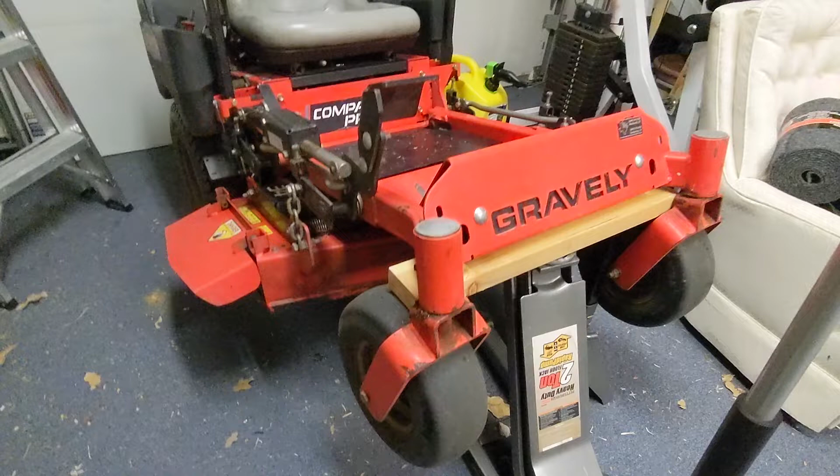Today we're going to be installing the Gravely Ariens OEM Mulch Kit on this Gravely Compact Pro 34.

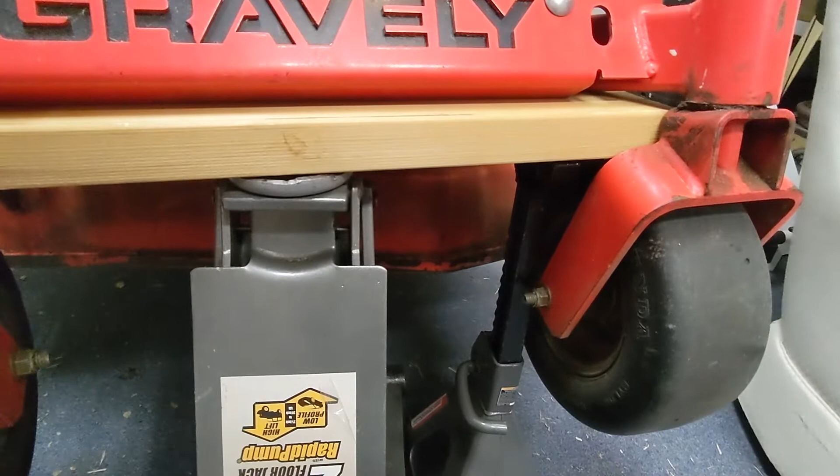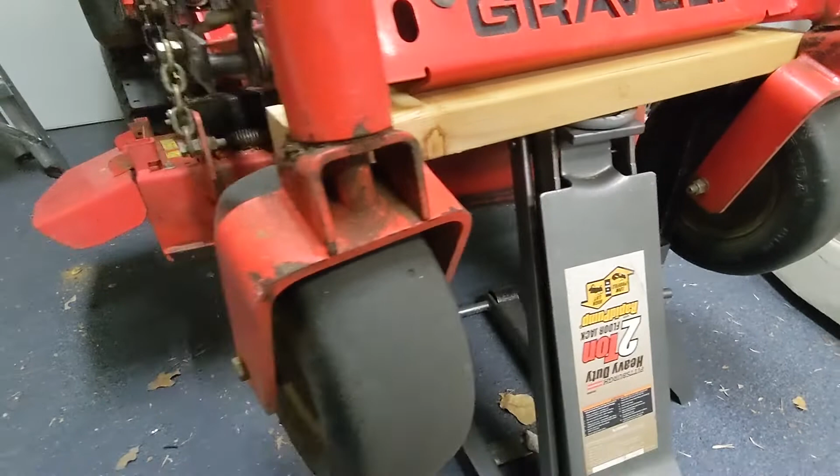As you can see, I've already got it up on a jack. Use a 2x4 across the front end and a regular 2-ton floor jack, and also make sure to use a jack stand. Lower the lawnmower onto the jack stand and then pump it up 1 or 2 more times so you've got support from both the jack and the jack stand, that way it doesn't fall on you when you're working on it. Add 1 more jack stand on this side. Now we've got plenty of access underneath to get to the deck, so that we can install our mulch kit.

Let's go see what's included in the mulch kit.

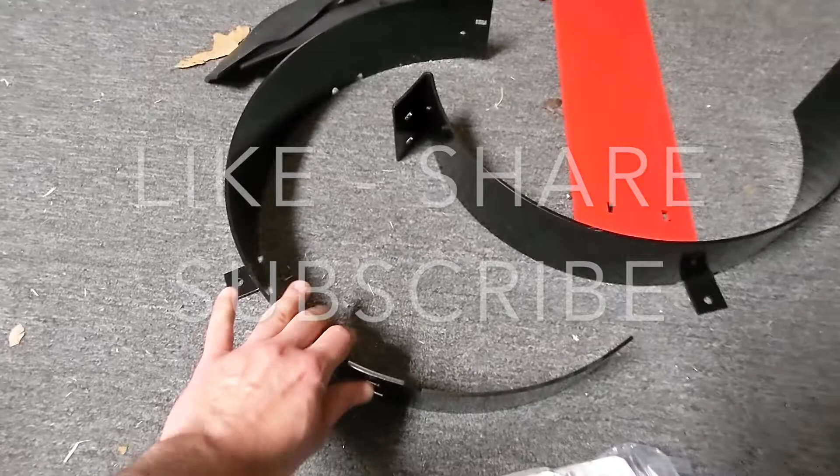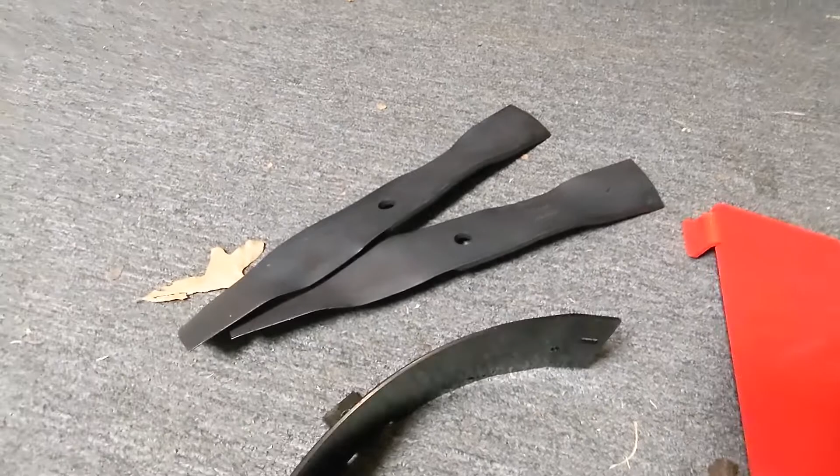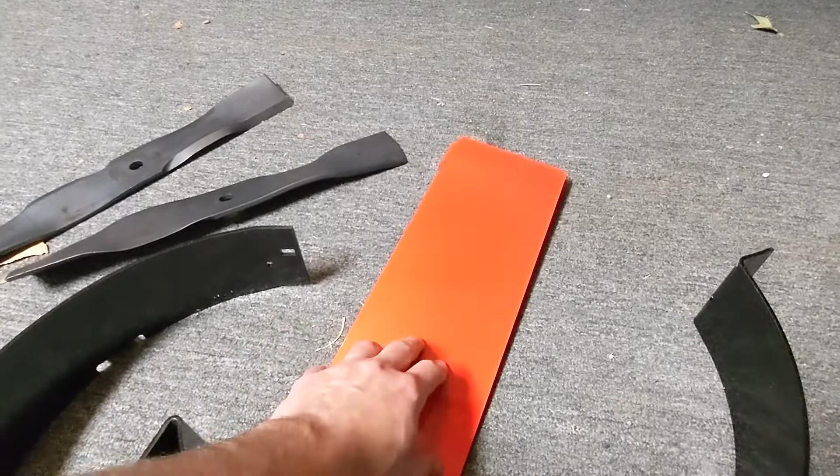In our mulch kit that just came in yesterday, we've got the 2 guards here that help isolate the blades in each of their chambers on the deck. We've got the 2 OEM mulching blades. You can tell because they have the standard lift edge that you normally would, but they also have another raised edge here, creating that turbulent motion under the deck that allows it to mulch really well. We've got the guard that goes on the outlet where the discharge would normally be for the grass clippings. We've got the hardware, which is nice that it came with, and then the instructions to get it put on.

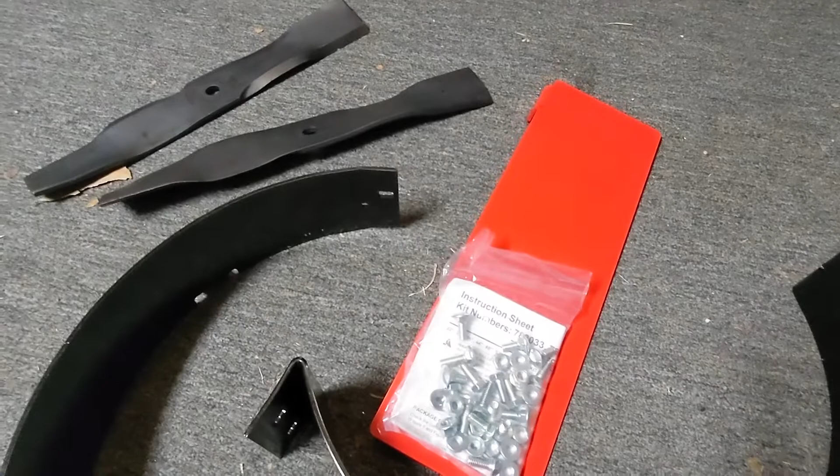So let's go see how all this comes together. The instructions are pretty universal for their different size decks, from the 44, 48, and 52 inch decks to the compact decks, the 32, 34, and 36.

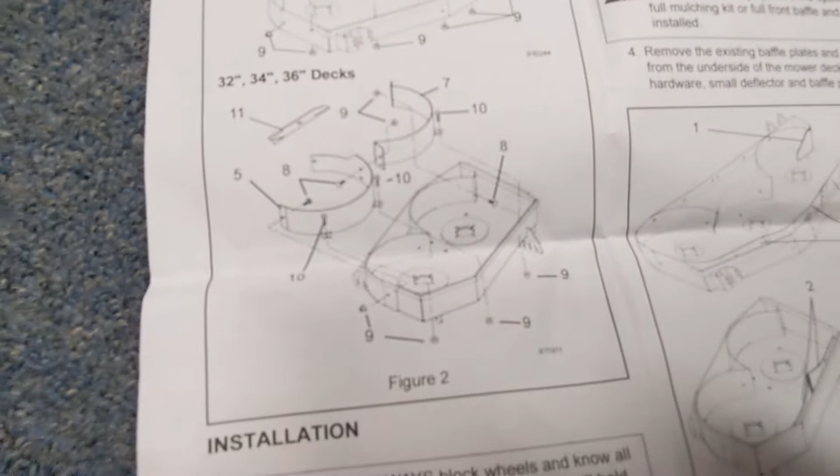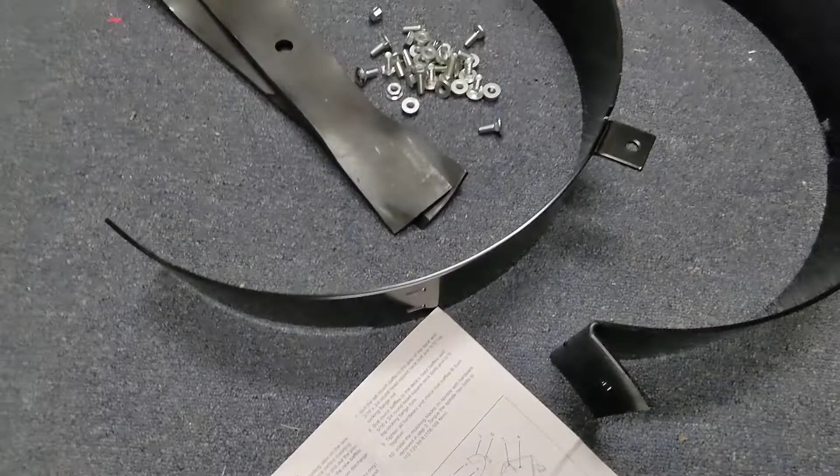We're going to take a look at this diagram, and you can tell the 2 isolator guards—there's one that's smooth, and then there's one that has the tabs on either end. If we compare that to what we've got here in the kit, you can see the same thing. We've got the one that's smooth and doesn't have any tabs on the ends, and then we've got the one that has the angled tabs on the 2 ends where it mounts, and then also they've got tabs where they mount to the top portion of the deck.

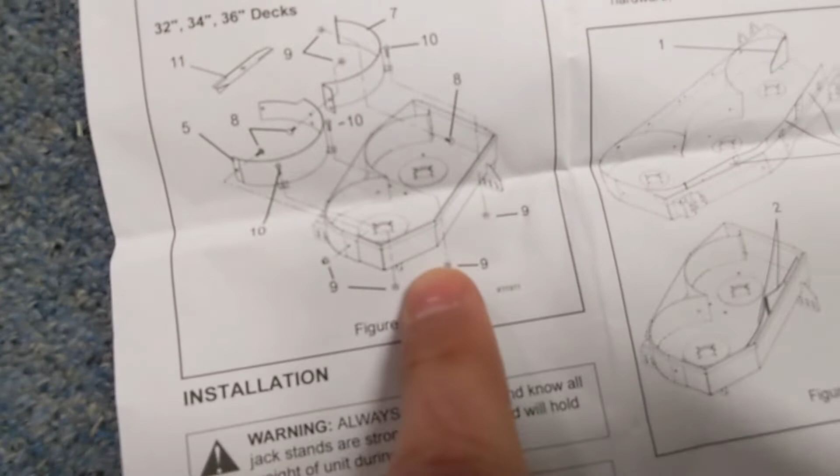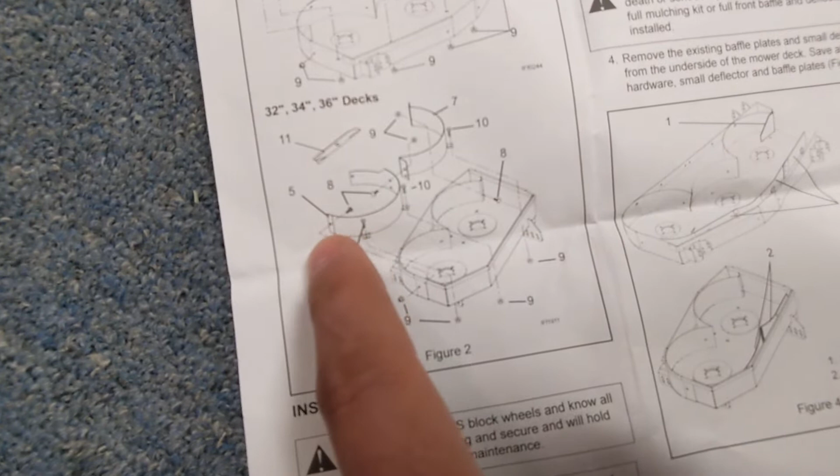If we look at the instructions, you can tell here on the deck, you've got the outlet of the deck on this side, and the isolator guard that has the 2 tabs on it goes towards the discharge port, and the one that has ends without tabs goes on the portion of the deck that is furthest away from the discharge.

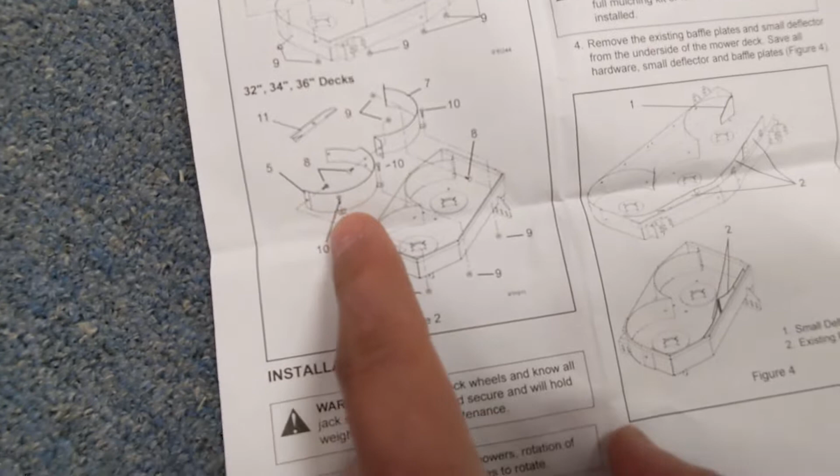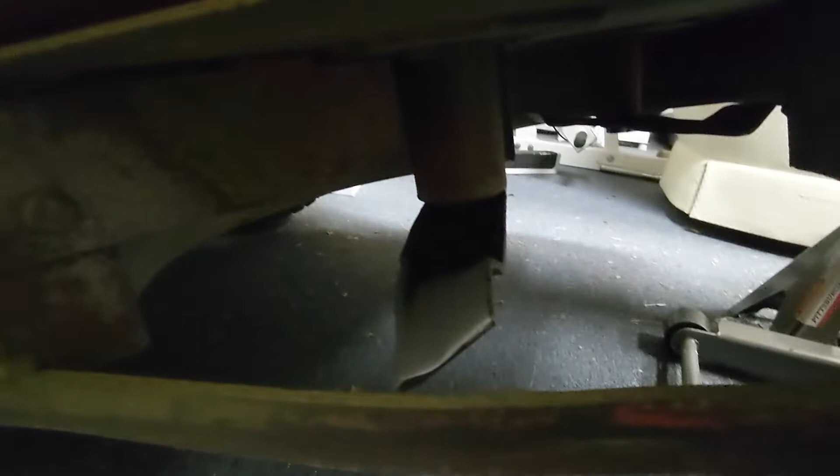So I'm going to go ahead and start on this one that's furthest away, and then we'll go step by step there. I'm going to lift this guy up, get it out of the way, give us some more clearance to look at everything. First thing we need to do is remove the existing blades.

You can tell these are high lift blades that are on here based on the extreme angle of the lifting edge. That's to get you to be able to discharge pretty efficiently, shoots the grass pretty far out. We don't need those on our particular lot where our house is—we're only on a half acre. Main reason for the zero-turn mower is because we have a lot of trees, and it makes it a lot easier to mow, being able to get around the trees a lot more simply.

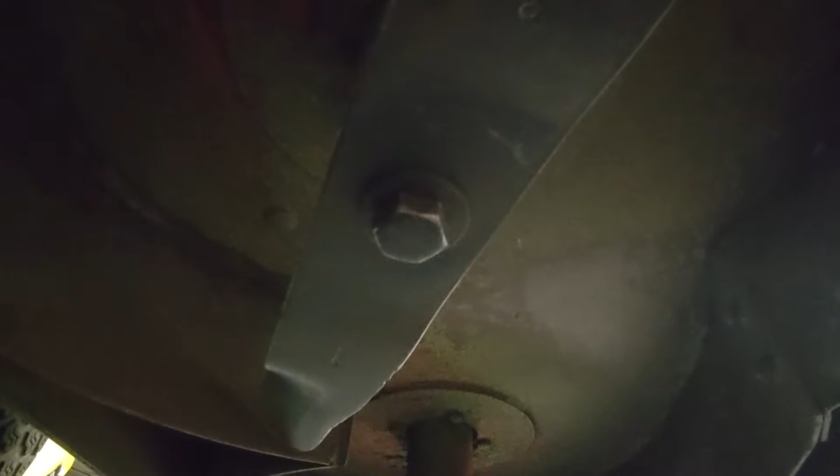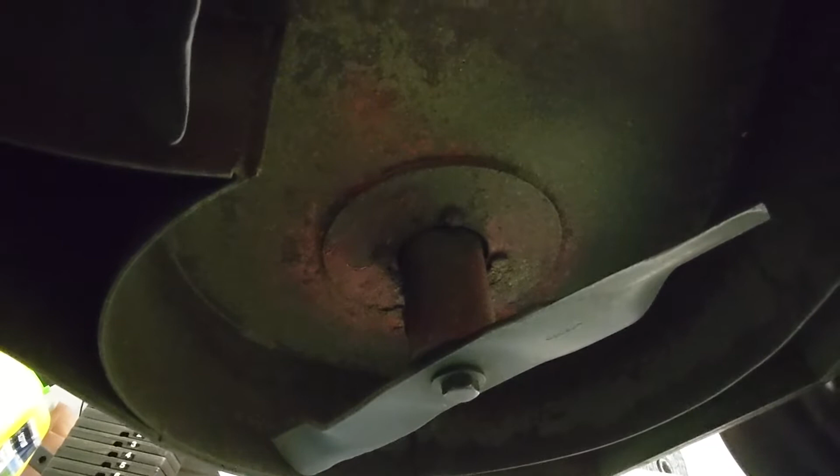In order to remove the blades, we want to remove that nut there, and once you do, save the hardware, washers and things that come out. We want to put the hardware along with the blades away, because we'll need the hardware to reinstall the new blades. Then the second blade there as well, we want to go ahead and remove that, and then we'll move on to the next step.

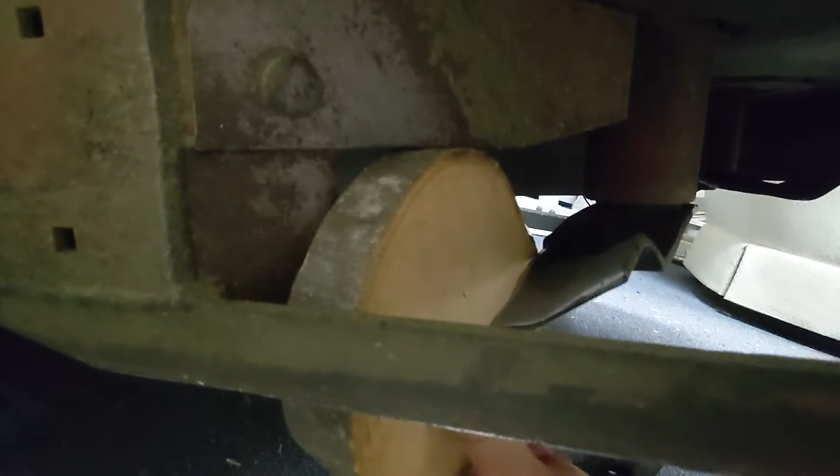So you can tell the blade spins, right? What we want to do is lodge it in place. What I'm going to do is put this little cut of a tree trunk right here, and that way the blade lodges up against it, and I can put some torque on that bolt and get it off.

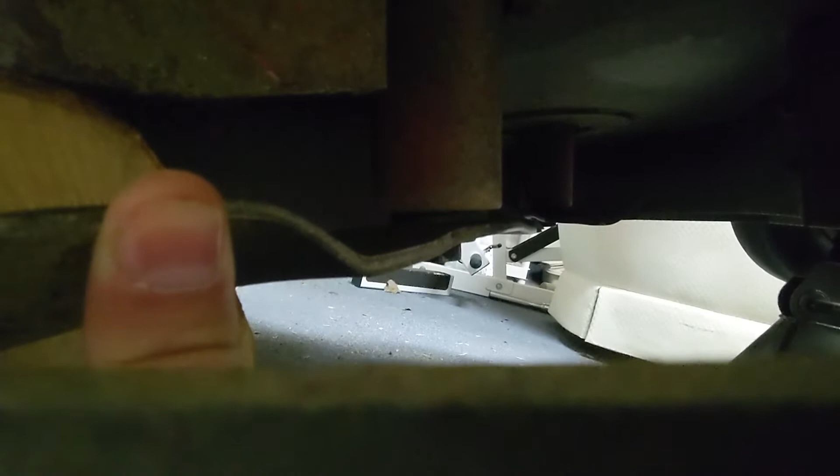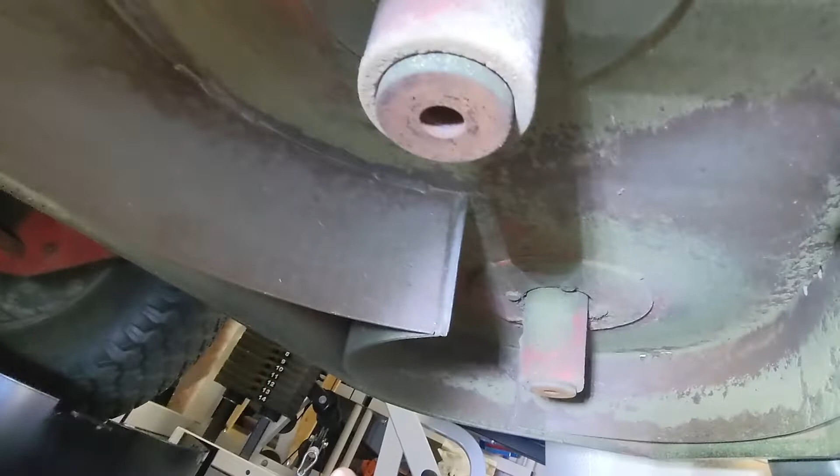Now we want to take the hardware off that holds—so this is the front of the mower, this is the back. You've got your semicircular guards right there towards the back of the deck. On the front of the deck, you've got this section here. So we want to take these off—they're not welded on, they're bolted on.

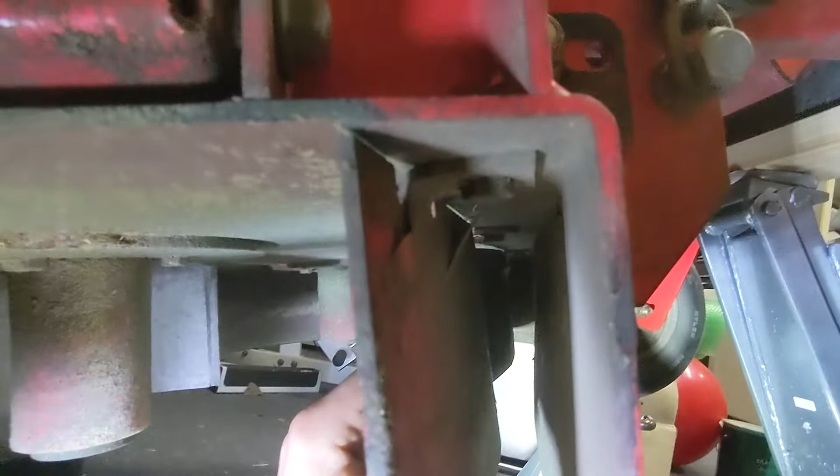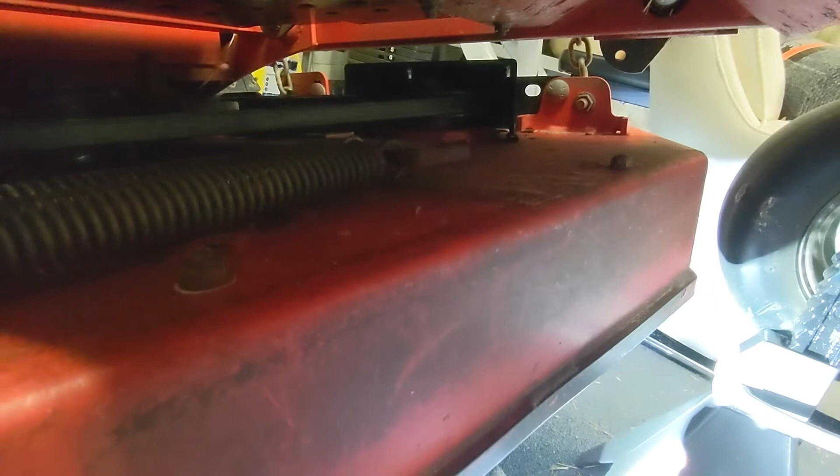There are bolts along the front edge of the deck, and the hardware is here, and you can see some of the other screws, or the bolts and nuts there towards the front. So we want to remove the nuts and bolts that hold this front guard on, and get those off, and that's where our new Isolator Guards are going to fit.

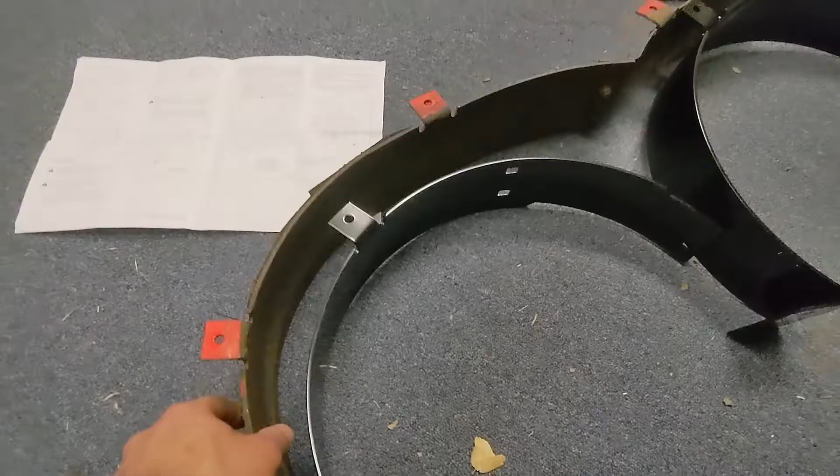This is the old Isolator Guard that came out. The discharge is that direction. This is the end of the deck that's closed off on the left side of the driver, so I've got it laying out exactly like it goes. This is the top, that's the bottom. And these are the two isolator plates that we need to put on, lining everything up to make sure they fit correctly. These two holes are going to go where the two old mounting tabs were.

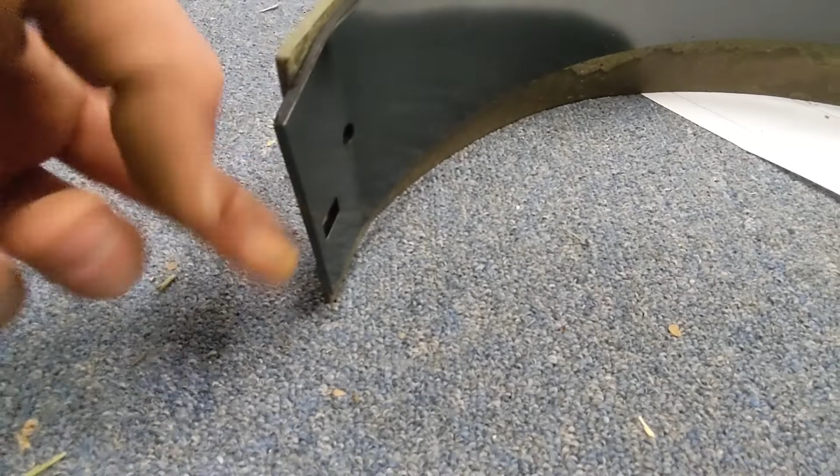And then there's also a side bolt that goes through here, a carriage bolt with the square fitting on this side, and then a nut on the outside. So we're going to go ahead and put this one on, and then we'll come back and take a look at the other one.

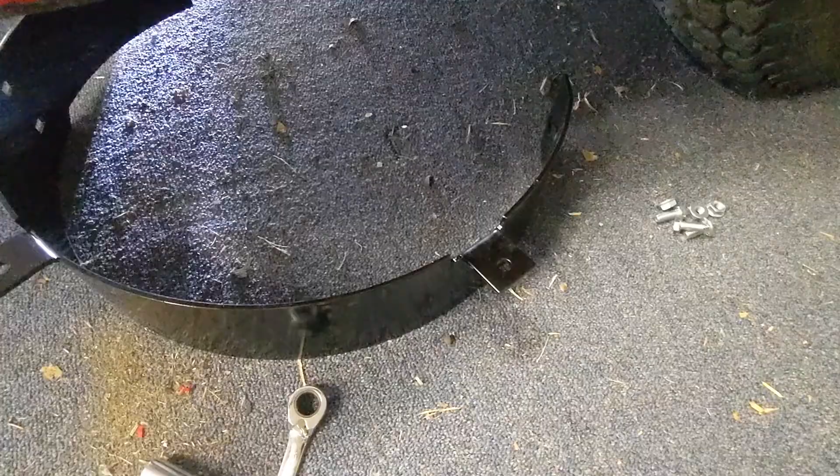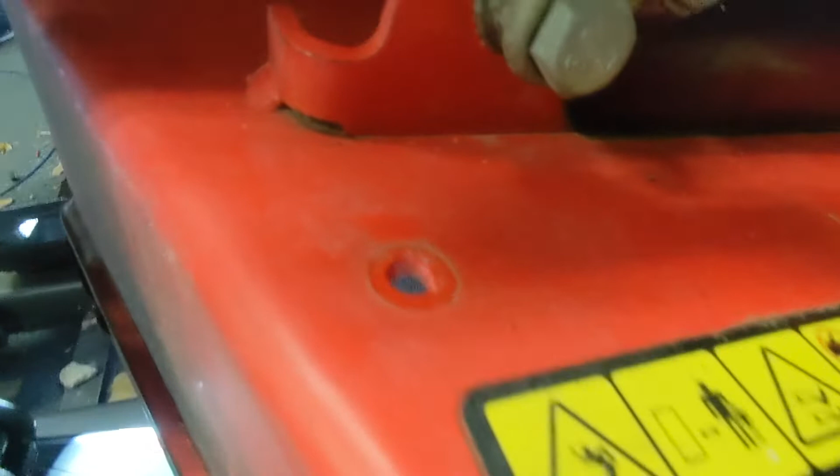I'm using the new hardware that came with it. We've got 2 normal bolts, 1 lag bolt, and 3 of the locking nuts. And on the deck, we've got 1 mounting hole here for the lag bolt, and then 1 here, and 1 in the middle there for the other 2 bolts. So we're going to put this on, and then we'll move on to the next piece.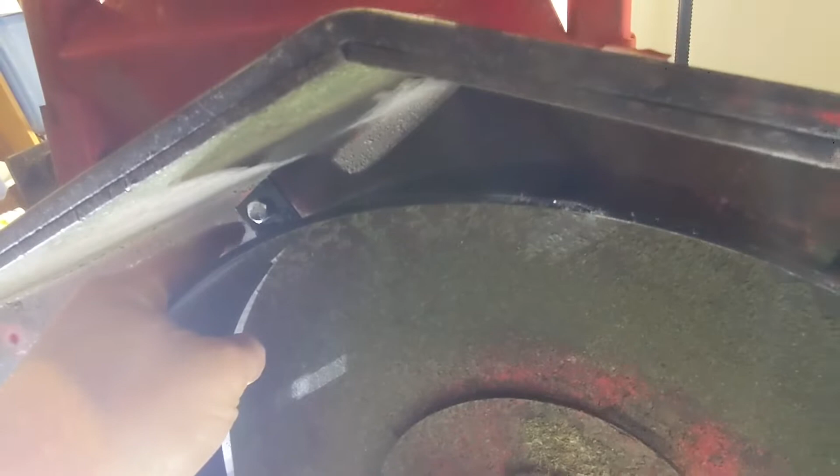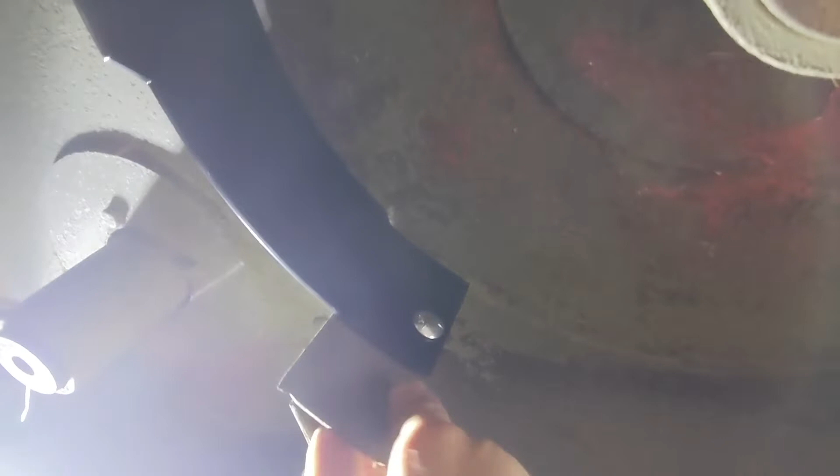Okay, we've got this isolator guard on. We've got the bolts that were used in the same spots for the factory guard, right there, and then right here through the side. If you notice, I haven't tightened them yet. And then there's another lag bolt that goes here that was not on the factory guard. That makes it a full circle so that it completely isolates that blade to that area.

And this one is a lag bolt as well. I had to loosen these other 3 to be able to force this one in, just to get it in, and then hand tightened the nut on there. And I'm going to go ahead and leave these loose because there are 2 other mounting holes here. I think they go to the other guard, so we'll find that out in a minute. Once we get everything to where we were able to start the nuts and get some threads on there, and it's all in place, then we'll go back and tighten everything.

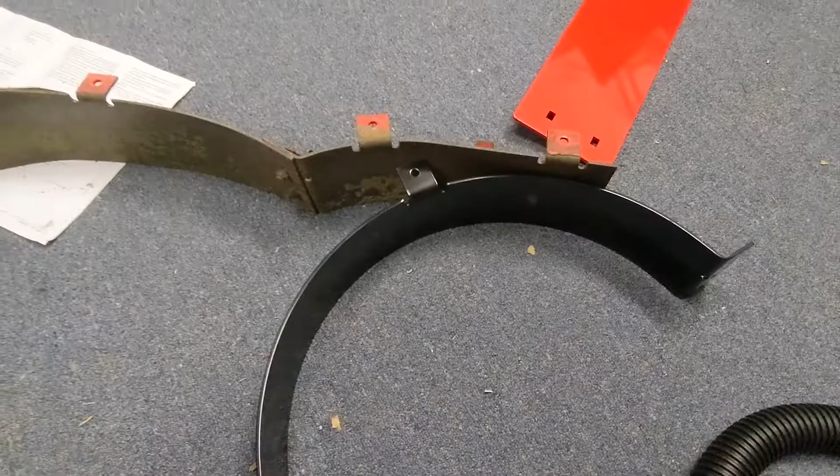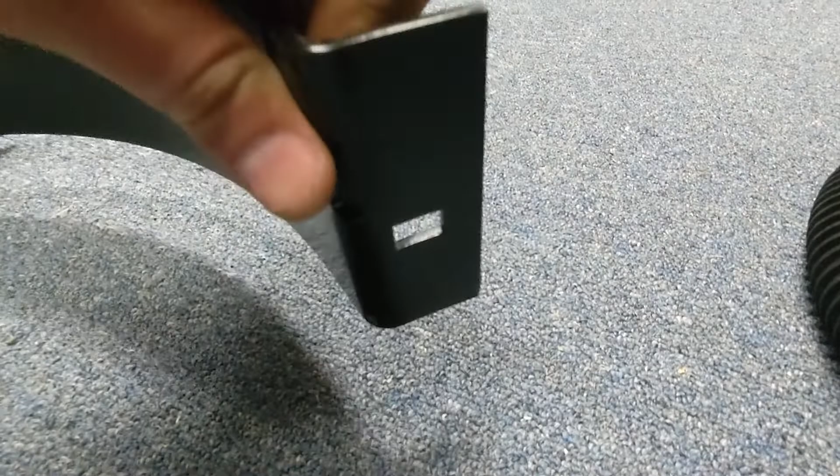So let's go ahead and get started on the other side. Now on this isolator guard, this is the one that goes towards the discharge, which would be normally the discharge. You can tell there's a mounting tab here and here for the old one. This one only has 1, and then the ends, there's some holes for some lag bolts here, and also a slotted hole on this side.

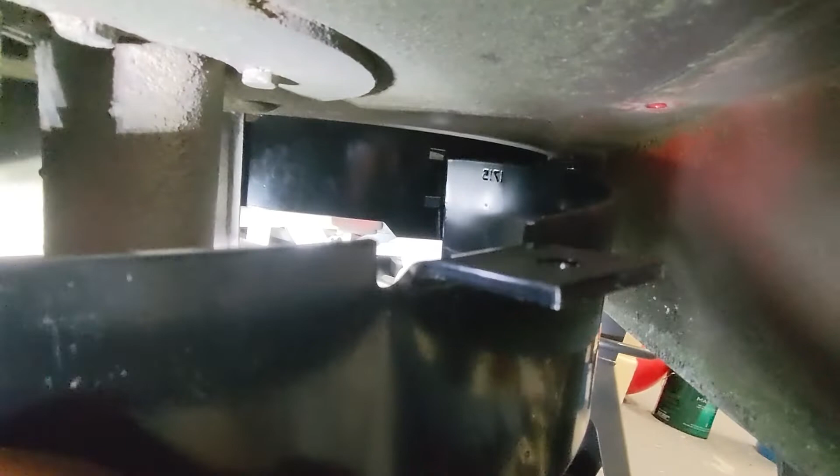Okay, now I see where it goes. So this is the new guard, and if you see there, that's the 2 holes on the other guard on the other side, and that's the 2 holes there on that tab. Those 2 go there, they'll fit up right against that. And then this mounting tab here goes in this bolt hole, which is right next to the discharge. And then that hole there will go here.

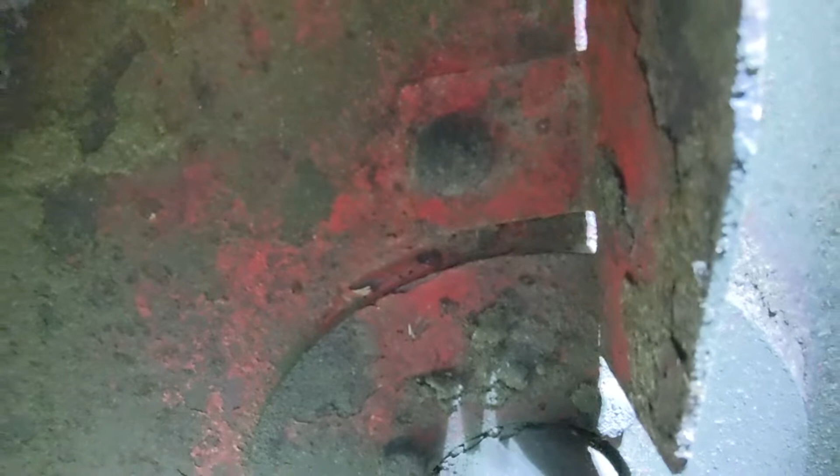We need to remove this piece too, which looks like it has 1 lag bolt here, and it's hard to see from under here, but there's another bolt right there with a nut on the other end. So we'll go ahead and remove that. Again, that's this piece here on the discharge. We'll go ahead and remove this guy, and then we'll be able to bolt the new one on.

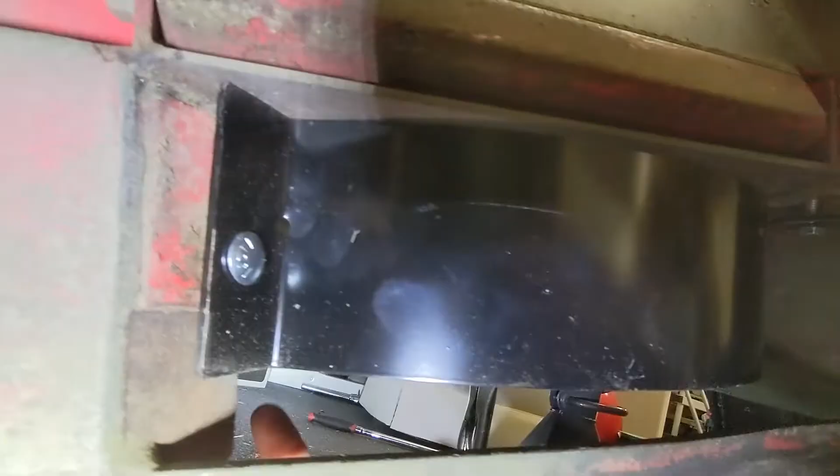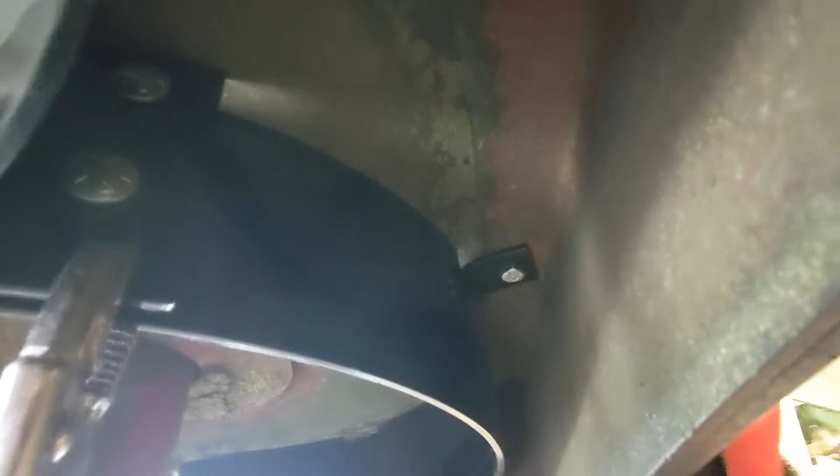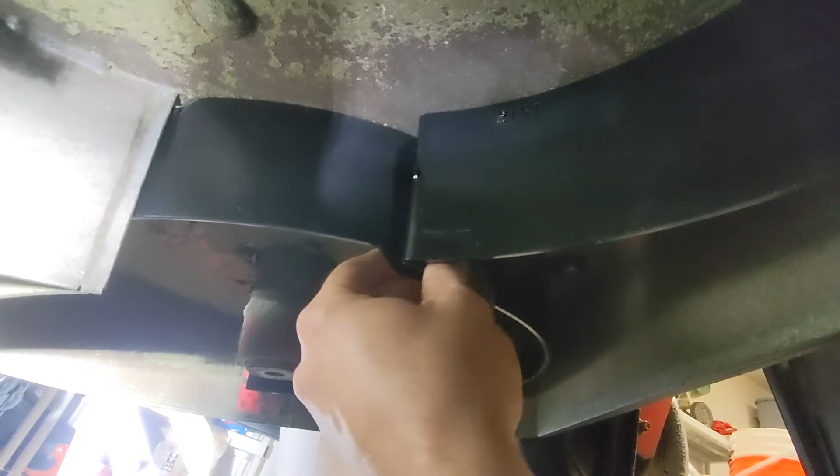We've got all the threads started here, and the 2 that go between these 2 isolator guards. Now, this one was not reaching. I used the longer lag bolts that they included in the kit. Still couldn't get it far enough in to get the threads started. I was racking my brain trying to figure out how to get this thick piece of sheet metal stretched enough to line up with the bolt holes, and vice grips did the trick.

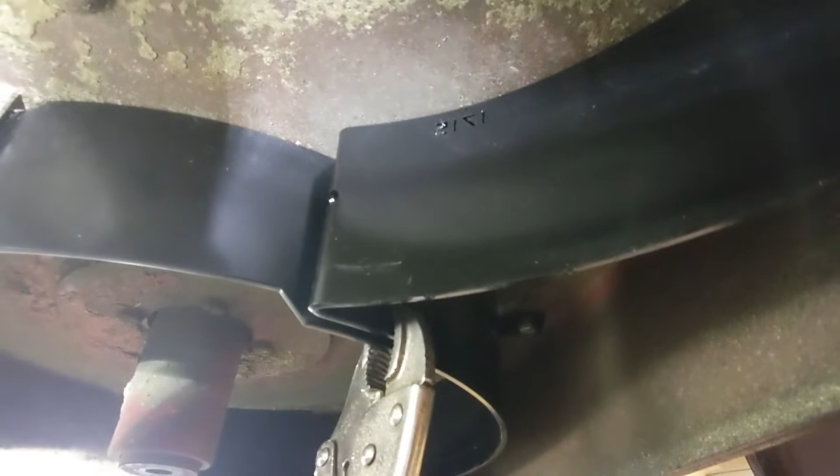So I lined them up best as I could, and got the vice grips on there. I don't want them touching all the way, I want the threads to pull those 2 pieces together. But I went ahead and did that and slipped the lag bolts through, got the nuts started, and that'll be enough to get this firmly in place, and I'll use the nuts and the bolts to cinch it down together.

Now, one thing I'm worried about is if it's going to bend this in a way where it comes into contact with the blade, but we'll get the blade on, spin it full 360, make sure that doesn't happen. If it does, we'll make some adjustments. So I'm going to take the vice grips off after getting a couple more threads on these nuts, get those tight, tighten down the guards on the other side, and then get the new blades on. Finally, we'll get the guard on that goes here to block off the discharge chute.

Now these are completely installed. All the hardware is tight. Make sure to check all your nuts and bolts so that they're all tightened up.

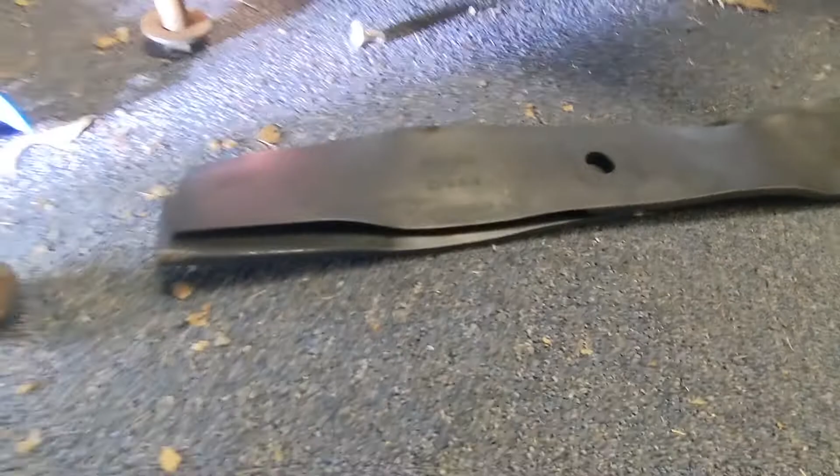Next thing we're going to do is install our new mulching blades. In order to install those, they don't come with new hardware. You're going to use the 2 bolts that you previously took off of the old blades. Get them started, and once they're hand tight, use your ratchet. Finally, if you have a torque wrench, you want to torque them down to about 125 foot-pounds.

Typical car lug nuts are somewhere between 80 to 95 foot-pounds, so it's tighter than that if you have to do it by feel. 125 foot-pounds.

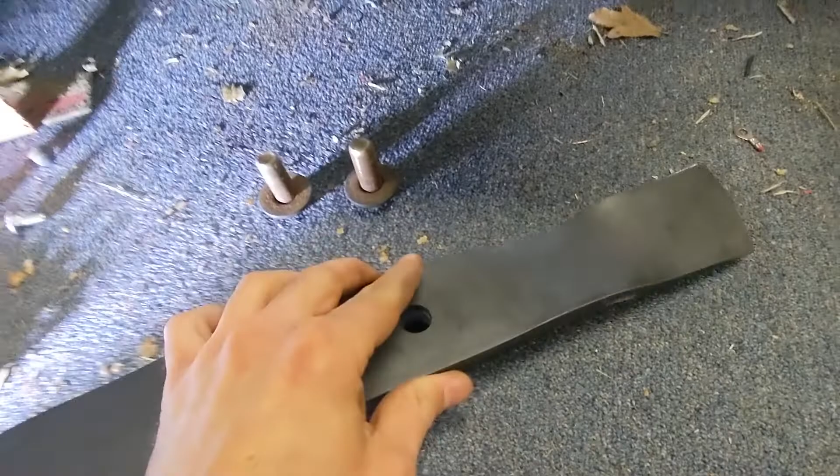As far as the blade orientation goes, you have the cutting portion, and then you should have the rising edge here on the outside, and another rising edge on the inside. So this is the wrong way. This is the right way. This is going to be up. This leading edge is going to be pointing upwards. And we'll go ahead and get those installed.

As you notice, both blades are the same. There's no difference between the right and the left. So let's go ahead and get those on, and then we'll check for clearance against the new Isolator Guards.

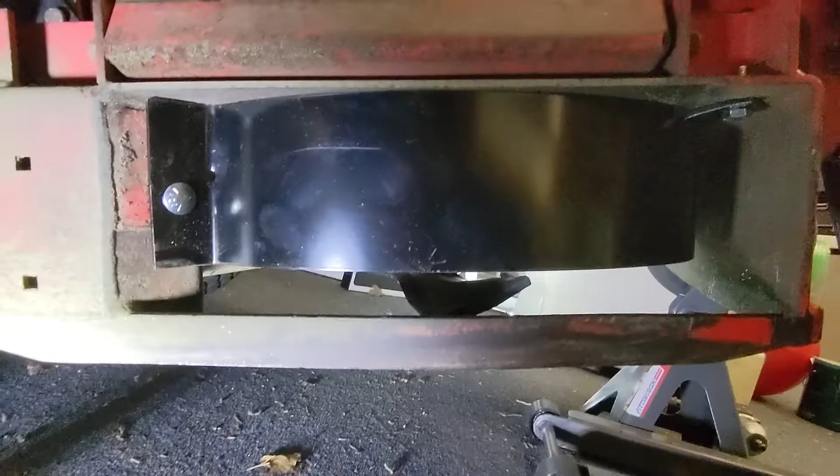Okay, the blades are on and torqued down. We'll go ahead and give them a spin here. They don't come into contact with any of the new hardware. That's perfect. So last thing we got to do, I already went ahead and torqued these down.

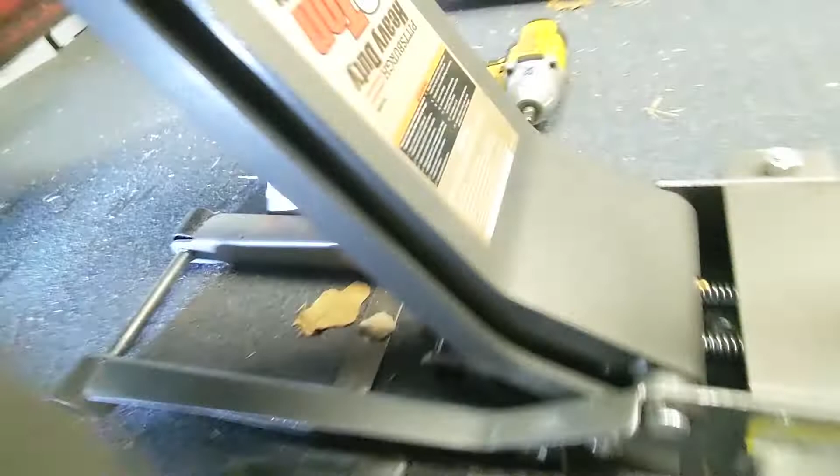If you haven't yet, torque them down, 125 foot-pounds on each one. If you can't get any sort of good leverage on them, or if they keep spinning around, use an impact. I used my DeWalt impact, works great. Then I went back with a torque wrench to make sure that they're tightened down to 125 foot-pounds.

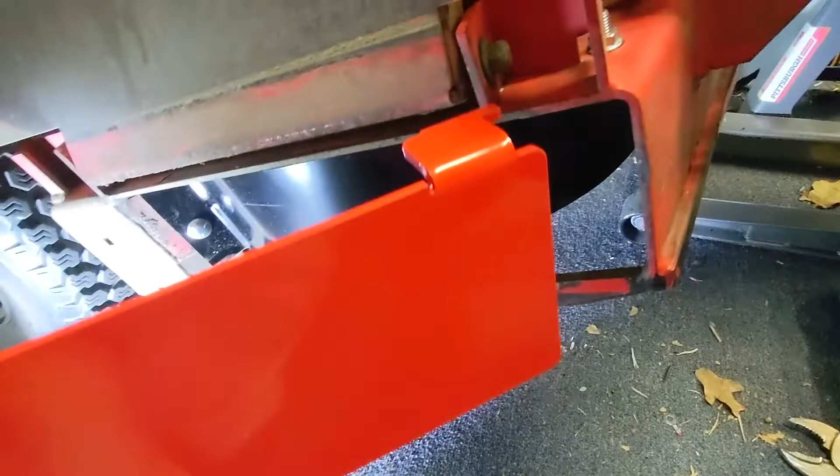So the next thing we want to do is put on the guard that goes here. That's this guy. It's got 2 holes for lag bolts, and on this side it has a tab. Looks like that tab just goes in there, so you put it in at an angle, it goes right in, and it holds itself in place.

And on this side we want to install the 2 lag bolts. I'm going to try to get those lag bolts in from the inside out so that I have easy access to the nuts. Let's see if that works.

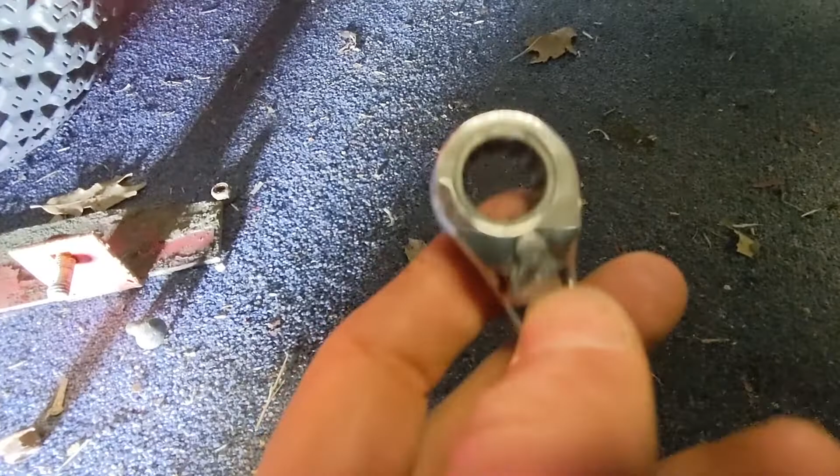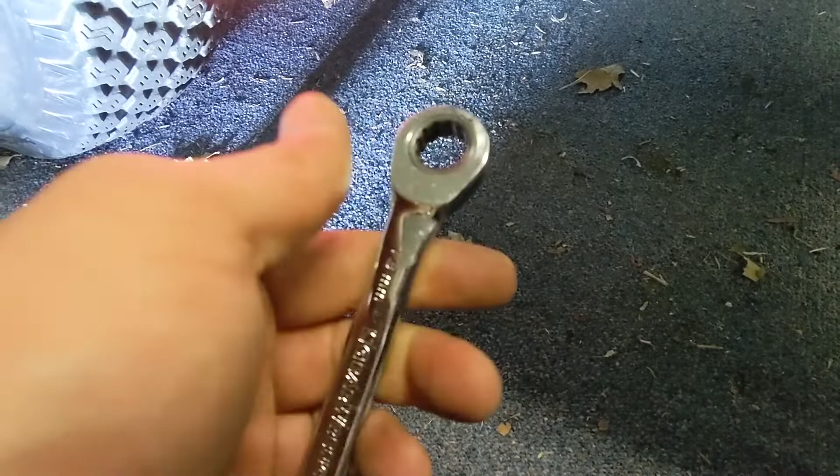Okay, we've got that on. I had to put the lag bolts in from the outside in, no problem. There's not a ton of access under there to get to those nuts, if you can see there. So make sure you have a ratcheting end wrench. If you don't have any, go get some right now before you start there. There's a few spots where you're really going to have tight access and you're going to need a wrench like this, but if you don't have a ratcheting one, it's going to make life pretty miserable. So go grab a set if you don't have one already.

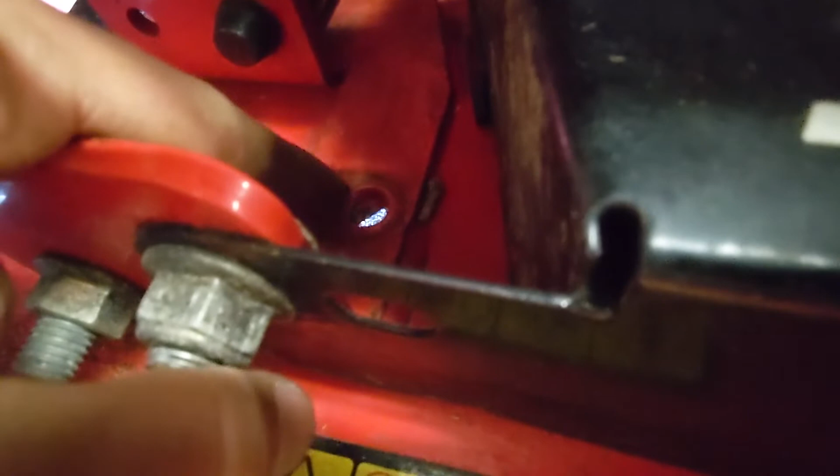And the very last thing we've got to do, there was a bolt or a nut here, if you remember, that was holding this guard in place, and we need to put a bolt and a nut back in there. I'm not sure if that bolt and nut helps to hold this piece in place or if it's just to hold the guard in place, but I'm going to go ahead and put a bolt and a nut right back in there. That way it's firmly in place and protected. I'm going to use some of the new hardware that came with the kit because there are some extra bolts and nuts.

And that's the very last step. After that, we should be able to give this a test and see how it works out.